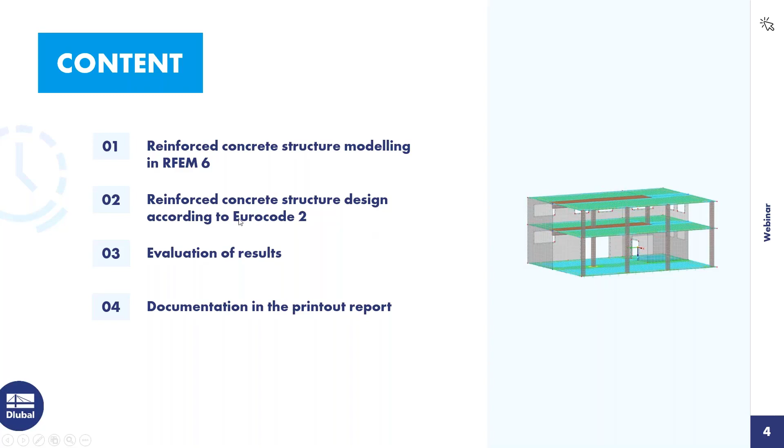I will show how we can work with the graphical displaying of the results, and also how we can print the results into the protocol in the printout report, and document our calculation. I will go now directly into the structure, into the RFEM structure.

The structure was already defined with the members and the slabs. I will only give you a short overview about the objects used.

The basics of reinforced concrete design, and also the design of members, the reinforcement definition of members, and the design using member representatives if we have more similar members, was shown in the first webinar for reinforced concrete structures, made in November of last year. That webinar shows the basic steps, how you can define the properties and settings, and my colleague Caroline will put the link into the chat where you can find it. It is very good for beginners.

So today, I will go into the design, especially focusing on things which weren't shown in the first webinar. The punching design wasn't covered in detail there, and neither was the rib design.

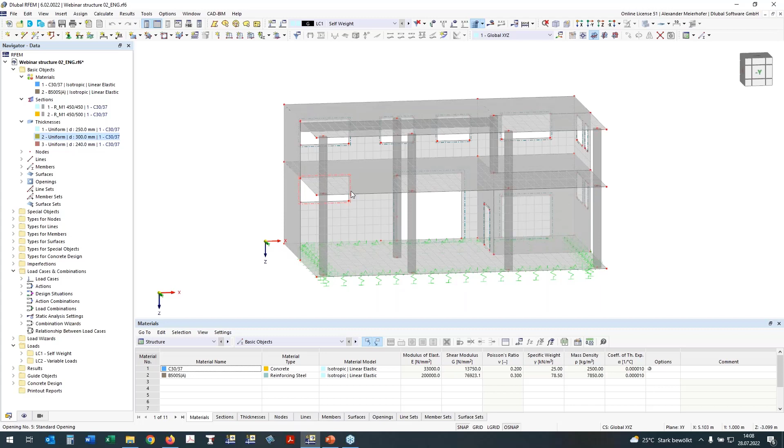The building now has elastic springs, so elastic support, and this will have also influence later in the settings for the deflection design, which I will show you.

At first, I want to deal with such nodes where we have the connection between the columns and the slab. Here we should make it in this way that mesh refinements are placed to have a better FE mesh.

For this, I go to the data navigator, where by double click I can open a new nodal mesh refinement and give my settings, which I have for radius 1 meter, and the inner target FE length is 15 centimeters. It comes from the dimension of the cross section of the columns.

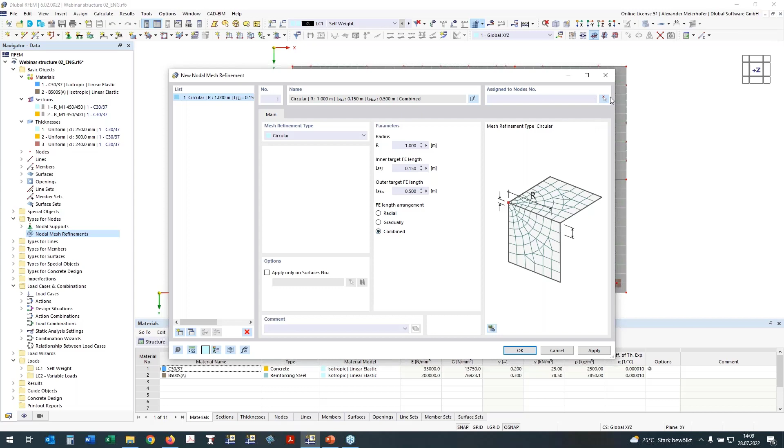For the length arrangement, I use the combined approach, and now I will assign the nodes with two rectangles where I want to have the refinement. If we take it through in the isometric view, we will see I have it caught, and everywhere now was my mesh refinement.

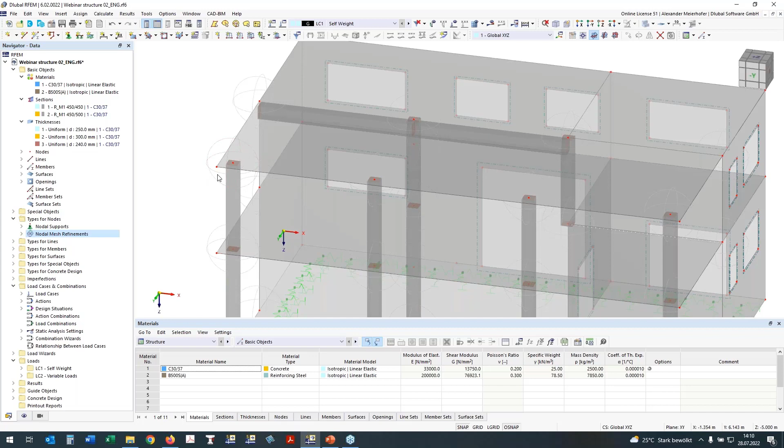On these nodes from the column and the slab, we have also singularities, and how we can deal with these singularities in the concrete design is described in a very good knowledge base article on our website, which I want to advise you. Caroline will also send the link to this technical article in our chat, so you can find it very easily.

I will continue and select one approach, which is the use of the surface result adjustment. It means I will select or define the area which is exactly the width of the column, and set there the inner forces of the surface to 0.

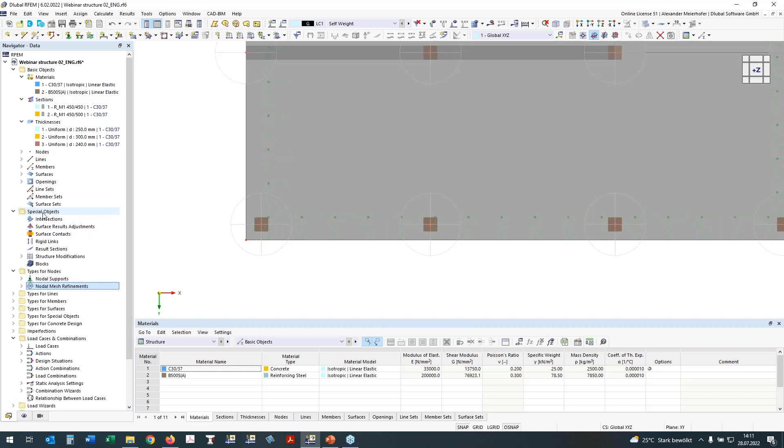Surface result adjustment can be found on the special objects. By double click, I can open the dialog, and now we can define a new rectangle result adjustment with the dimension of our columns.

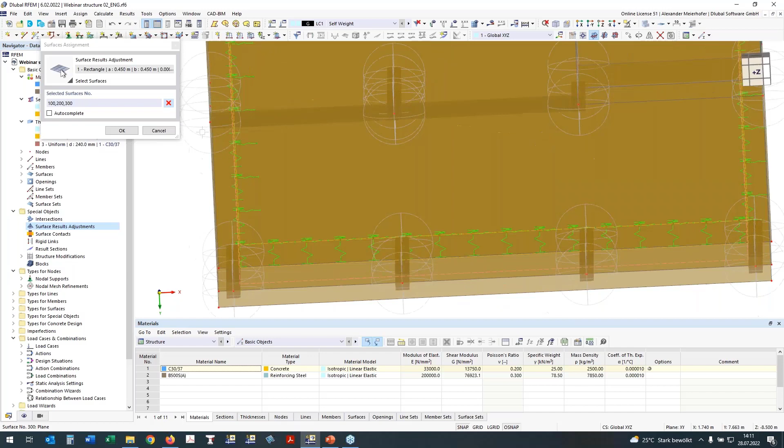I want to have it on all 3 surfaces, and you see the number of my surfaces was so chosen that I know where it's placed. So 100 is the slab on grade, 200 the slab over the ground floor, and 300 is the slab over the first floor.

If I press OK, I have already assigned the surfaces, and now I have to define the center of my adjustment. By copy, I can simply copy this adjustment and set only the new center of the result adjustments, and then I will have it in all areas.

I make one new and want to define it also over the wall. The width is 25 centimeters, and I defined a little bit bigger area, and defined it here because here is a wall. Define it also in this area.

I made one mistake, now I forgot the adjustment type to define it. I want to set it to 0, and I want to set all inner forces to 0, and this should be done for all defined adjustments. So I was one step too fast before.

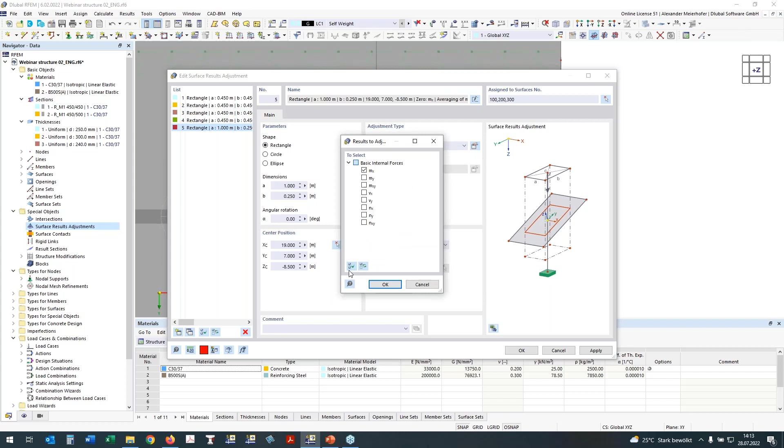This should be done before I copy it, and then it is also always in the right setting. By OK, it will be placed. We can see it, and we can also work here by drag and drop. We copy it by drag and drop. If we press the Control key, you can put it by drag and drop, and it's very simple to work with it.

So this is then for the connection of the columns to the slab. One additional setting for the slab is necessary. I want to have hinges here over the length of the supported line. The definition is very simple.

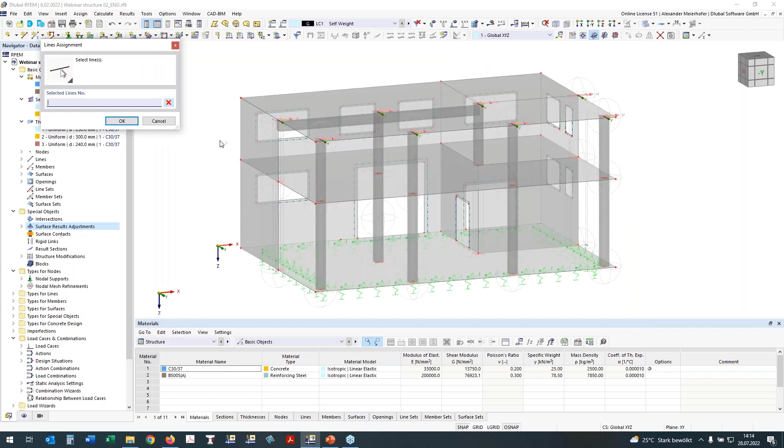We make a double click on the surfaces, and the edit surface dialog will be open. Activate hinges, and in hinges I click to select lines, press Control, and then I have selected 3 lines where I want to have hinges. The hinge type is by default already the moment hinge, and I will put it to all lines, the line hinges number 1.

Okay, it's ready now, and if we take a look at our refinement, it is everywhere placed, and also the adjustment. In the display navigator, we can deactivate the mesh refinements because I don't need it anymore for the work now, and the graphic is then more clear for the presentation.

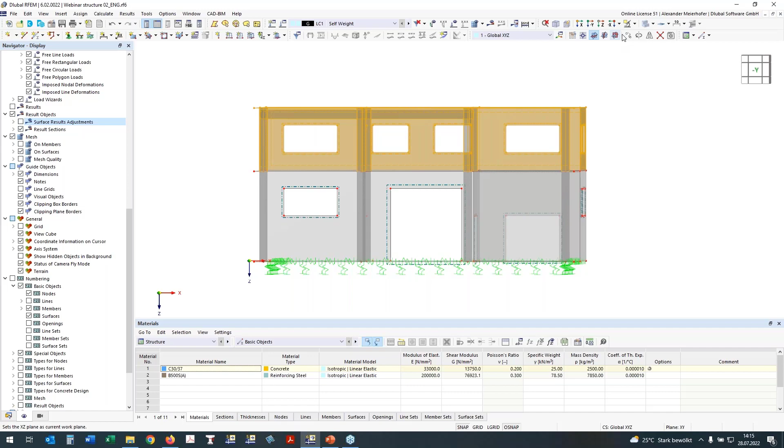As next step, I will define the rib for the slab over the ground. For this, I will hide the first floor by selection, and now I have the first floor.

By using new member, I can define now section rib by selection of the section number 2, which should be used for the web. The web should be 500 millimeter high.

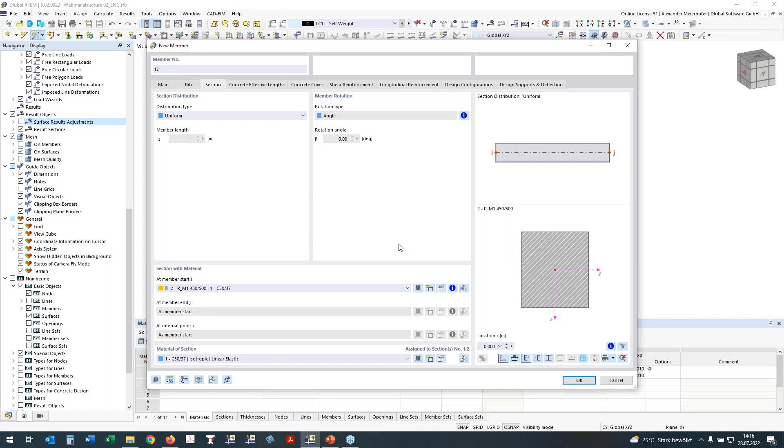I can define now the rib from here to here, and also from here to here. Oh, something was wrong. Okay, I do it again.

I know what the issue was. I will make the selection new and select only the slab which I want to show. So the new member is the same section, section number 2, and then from here to here.

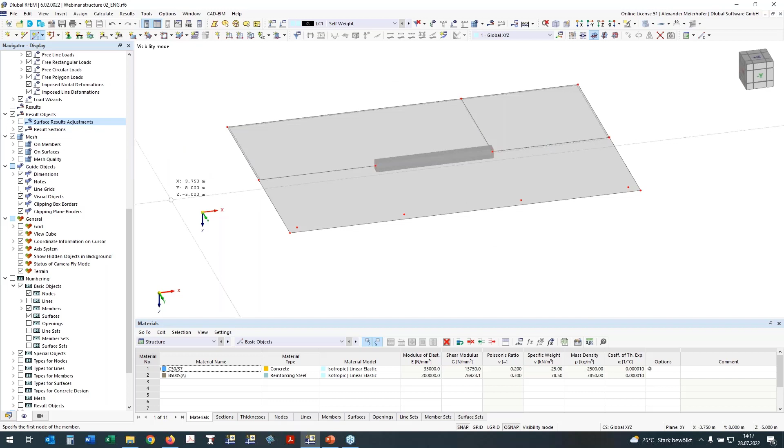By escape, I come to another point. If we take a look at the complete view, we see in the first part I took care of the rib. I go now into the rib section, and this is a very new feature: we can now also define more sections or segments during one length of the members. This is completely new developed.

I use here the calculation of the width, the integration width according to Eurocode 2, and the splitting of the segments can be done in 50%, 85%, and also 100%. Now we have more integration points. Here we have an inner support, and this means we have to consider for the calculation of the integration width the length of the neighbored span length. So I have to define here 180, and I now have my different integration widths.

We also have a new option to make a linear distribution of the integration width, and now we have defined the rib for the design.

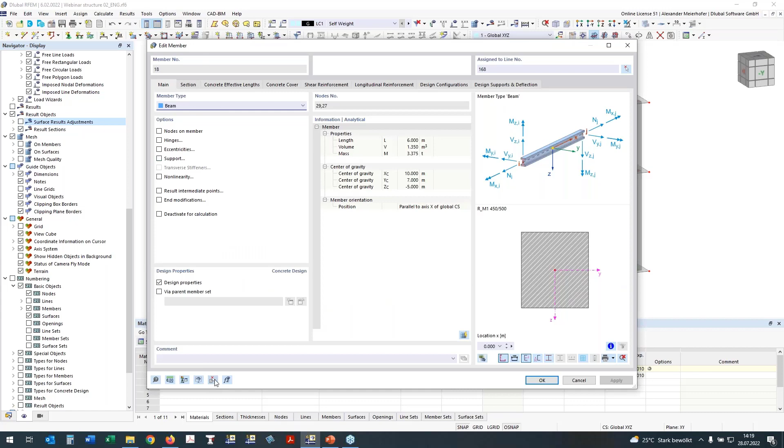For the second member, I use here the copy of object selections. It's a very nice tool. If I click here, we have really copied all inputs for the rib, and the only thing I have to change is that the end field is related to the segment, and this is for the user-defined point 80. Then the inputs for the static analysis are ready.

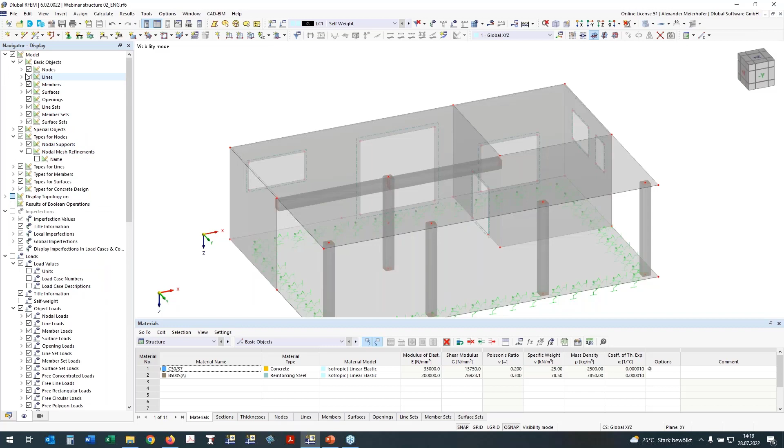Now I do it again as before. A very nice feature from RFEM 6 is that we can show the rib section also in the graphic, and we see that the integration width is also shown here in our main graphic of RFEM.

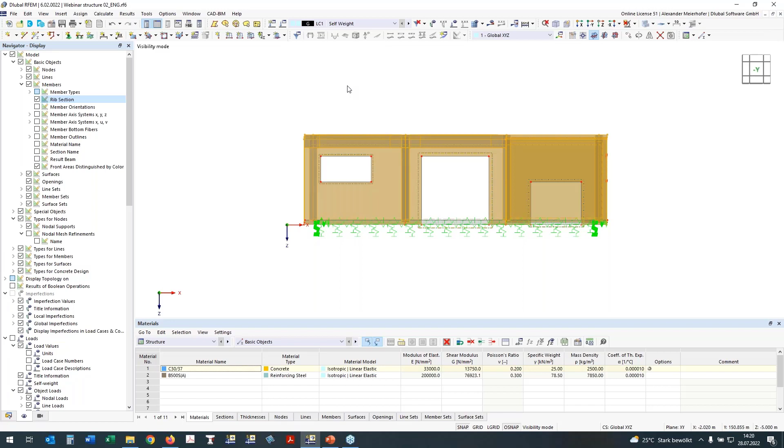Okay, now I will select again my slab here, and continue with the definition of the design properties.

The design properties for the reinforced concrete calculation are activated by double click. I come into the surface dialog, and I continue with the concrete cover. The concrete exposure durability is defined by the exposure class, which defaults to XC1. This is what I let it be. It's okay.

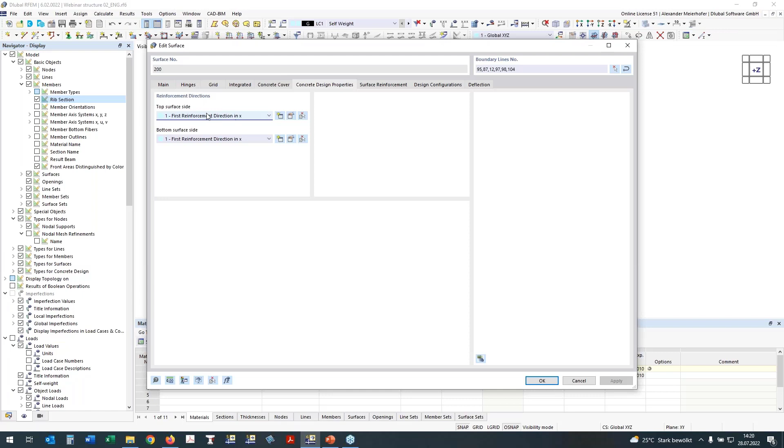The design direction of the reinforcement is the first direction, which goes in X. This is also default, which I will not change. And here is one important topic.

In the surface, I need a surface reinforcement with diameters so that I know the statical depth for the calculation. I just design a type of basic reinforcement, which will be in both directions, the diameter 10 with a distance also of 10 centimeters, and by pressing OK it will then be assigned to the surface.

Here are listed design configurations, which I don't discuss today. This was covered in the first webinar in great detail. I will later take a look at the serviceability configuration.

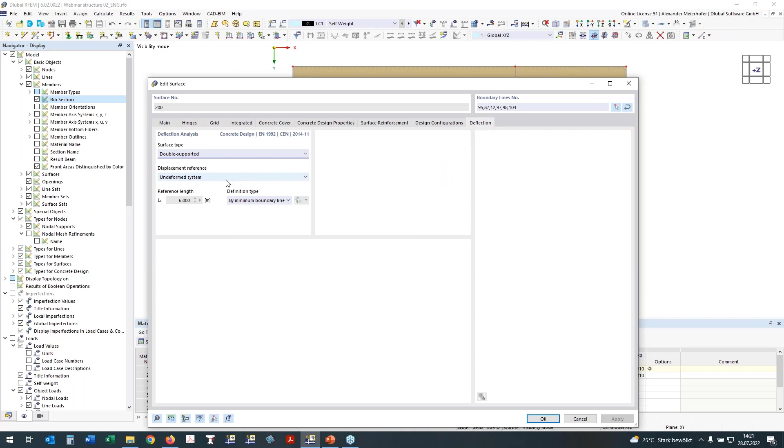But here's one very important thing, which I mentioned before at the beginning: we have an elastically supported structure. Therefore, it is an advantage to relate the deflection to a also deformed slab or plane. Here I use the parallel moved slab as a reference plane for the deformation, and as reference length I will define it manually by 2 points, saying my reference length for the maximum allowed deflection is from here to here.

It's about 5.5 meters. By OK, I have defined all properties for the reinforcement design. We can also take a look at the graphic.

If we go to the types of concrete, we see here we have surface reinforcement longitudinal, and if we activate it, we see that the reinforcement is defined in this area.

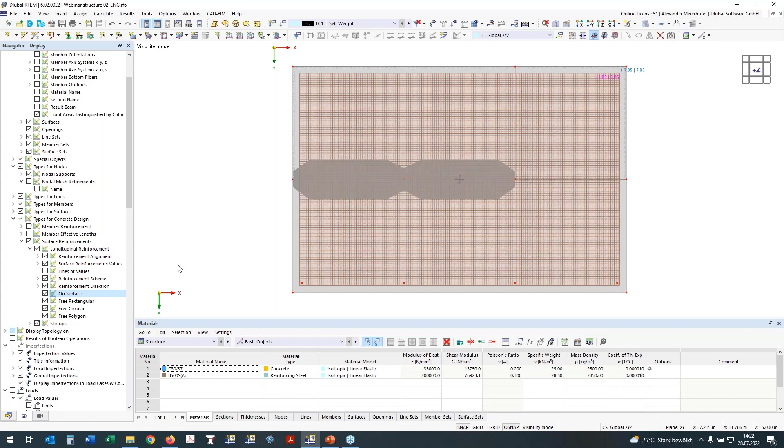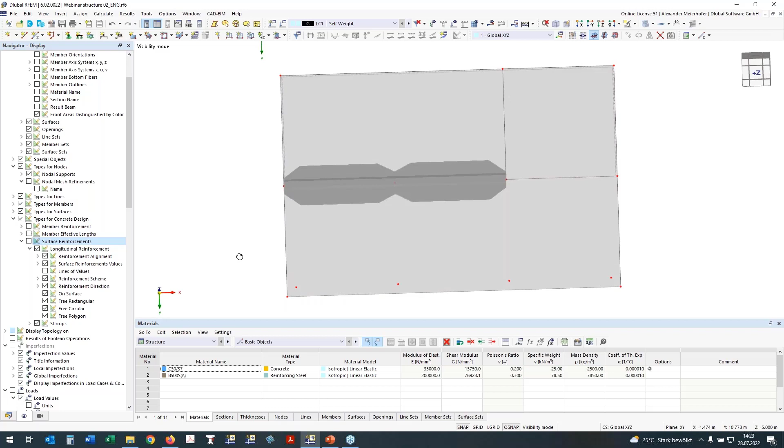I will go now to the definition of the ribs. Here we need also reinforcement. I want to design not two members, I want to design it with a set of members.

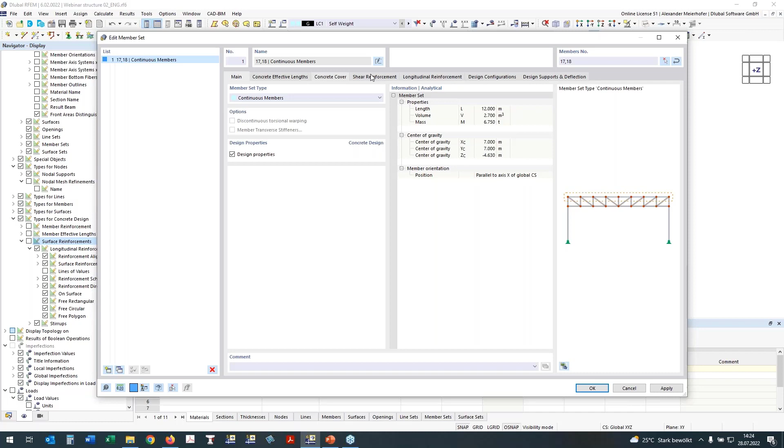So I select both by pressing the Control key, and create a new set of members. Here we have now the new set of members, and I can say design properties for this set of members, and we see that now all inputs for the design properties are open. It means the concrete cover is now shown, and here we have also the same durability which we have already used for the slab, XC1, and the shear reinforcement.

I will change the distance to 50 centimeters, and if we take a look in another view, then we see here the cross sections, or the variable cross section of the rib, is already shown, and also there is the reinforcement. I will go to the longitudinal reinforcement. We see here the reinforcement which we have defined for the slab design is already placed here. If we go more, we will see it.

It is activated by this icon. If somebody doesn't want it, you can deactivate it or let it. I want it, so I will let it here.

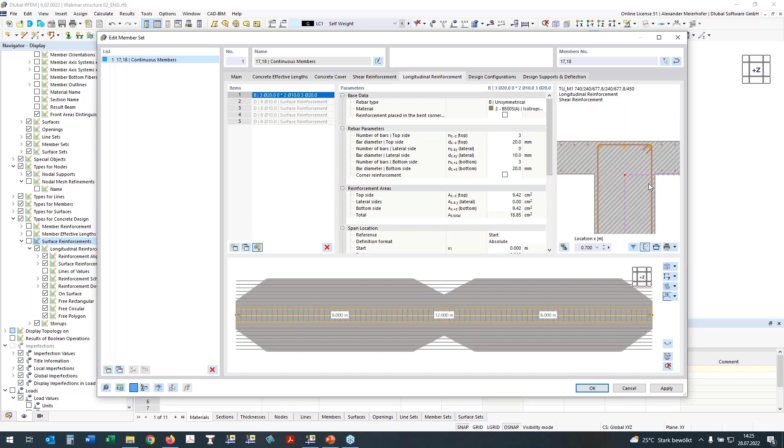But I will define now a different distribution of the longitudinal reinforcement. I want to have it unsymmetrical here in the web. So on the top side I will define these three rebars with diameter 20, but a lateral reinforcement also from 2 diameter 10. And on the bottom side, I want to have 3 diameter 20. It will be directly updated here in the graphic.

Here is also the 3D graphic of the reinforcement, which can be used for control of the inputs. Here we see a small reinforcement drawing, also the used shear reinforcement, which can be activated or deactivated. It's nice for control and for printing.

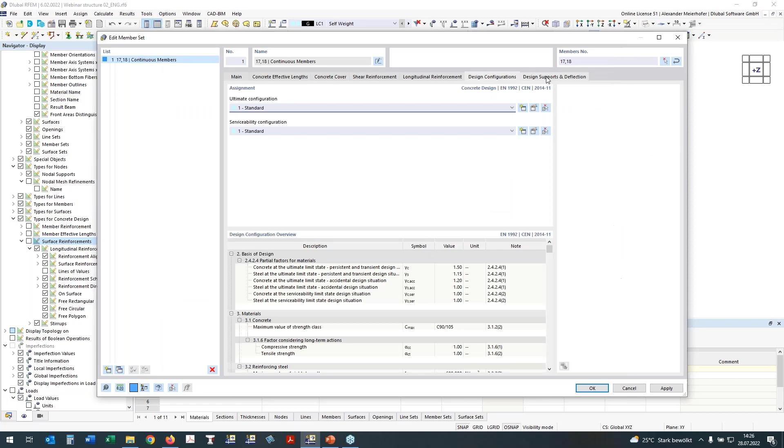Okay, I can close it. Design configuration is the same like for surfaces in all parts. And now is one important tab. We have to define now the deflection properties or conditions.

I want to check it only in the deflection in Z direction for the gravity loads, of course. And here is the point: my reference is then the deformed segment ends. This is also the point which I mentioned. We have an elastic supported structure, so it means also the supported ends will be a little bit displaced in Z, and this I don't want to have in the design check for the deflection.

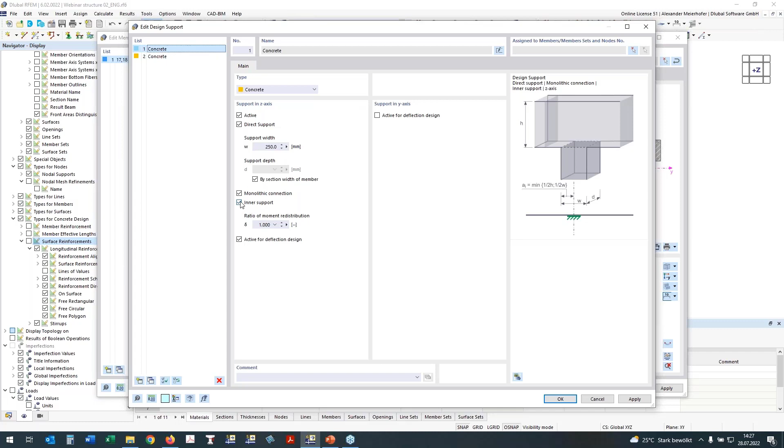Important is that I generate on the ends or in the middle some design supports. We have here design supports in Z direction, and our wall is 250 millimeters. It's a monolithic connection, and will be used for the walls on the end and the start. I directly copy it and use here also the width for the columns, which are inner supports, and here I have to deactivate inner supports and press OK, and then it will be placed directly at the beginning.

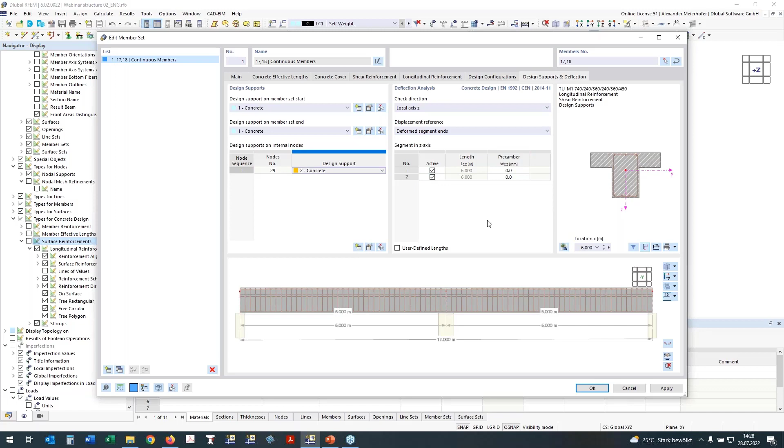I will change here the view to see it. Here we have the first one, and at the end it will be also placed, with the 250 millimeters width. And in the center I will also use the design support, but it is now for the column and it's bigger, it's 450 millimeters. And we see here now for deflection we have some lengths, 6 meters and 6 meters, and if we have some pre-camber we could define it here, but in this case I don't have it.

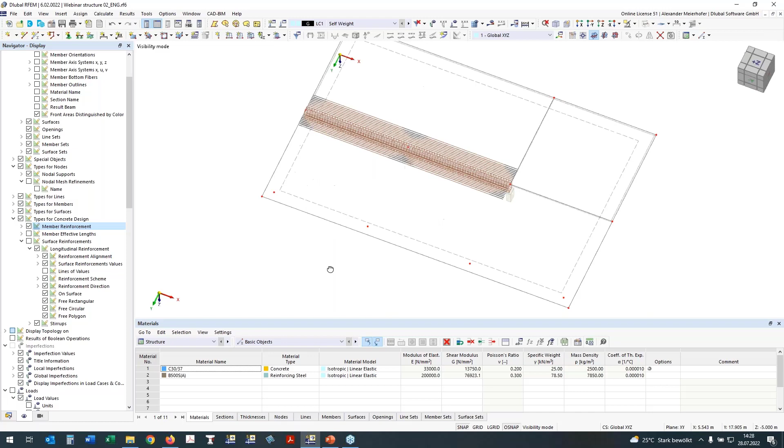But okay, we have now, we can confirm the inputs, and also we can check the member reinforcement and display it, and see that everything is okay.

Before I start with the calculation, I will make now new object selections. I have to be a little bit bigger. Create new object selection, and the advantage which will be done with this object selection you will see immediately after closing the dialog.

This is my slab over ground floor, and I press OK. And now we have here in the guide objects, the object selections, and you see I have already done a little bit more, but the new one is the object selection number 200.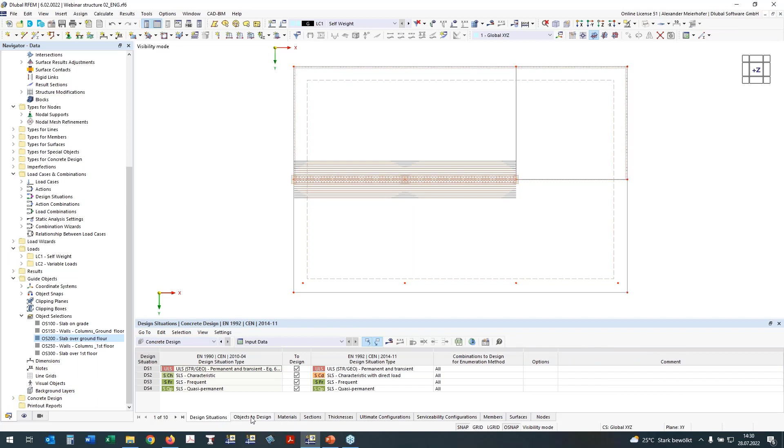And if I go now to the concrete add-on, I can use the object selections directly to define all objects which are there in the add-on. It is then replaced, and it will only show the object, and it is very good to organize the work.

Before I start with the concrete design, one hint about what you have to check in the basic settings: you have to activate the concrete add-on in the design add-ons, and in the standards you have to define the used standard for reinforced concrete design.

Here I will use Eurocode 2 with the original rules, so without national annexes. If we have the loads, this is also an additional hint. I have defined a load case for self-weight and variable loads. We have to define the action category there, it's for the office. And in the base data I have defined the combination group and the combination wizard.

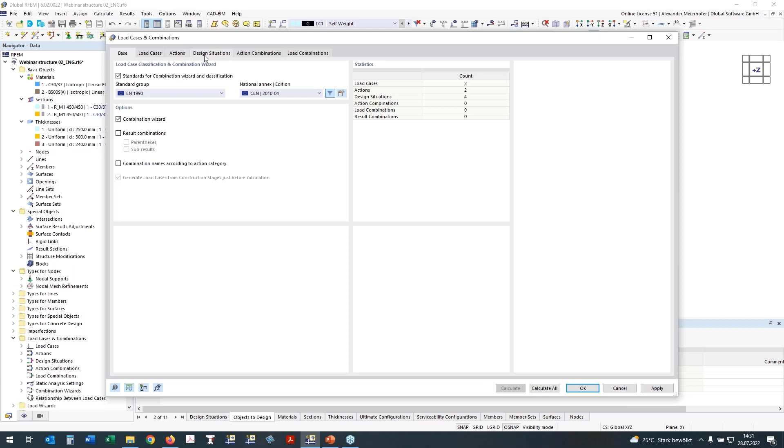In the design situation, the serviceability and ultimate limit state design situations will be listed automatically. Here will be the list of all activated design add-ons. Here we work only for the concrete design, so I activated it for the concrete design, and all load cases related to this design situation will be calculated.

I can multi-select it, and what I have to do is select my combination wizard. The combination wizard here is defined in this way, so that we generate load combinations, and the static analysis should be done by first order and geometrically linear.

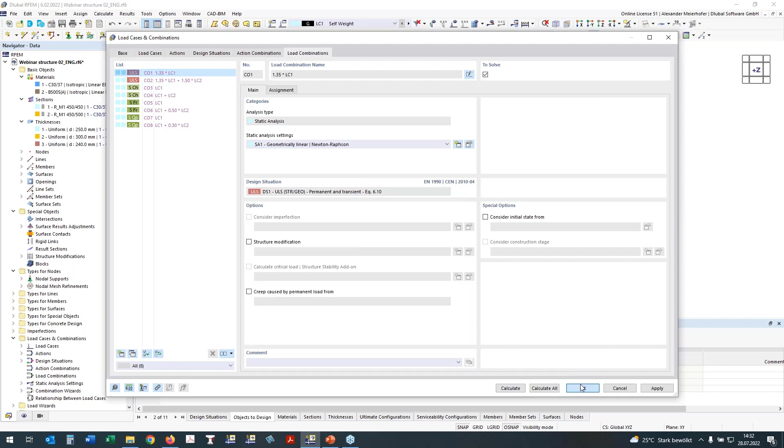If we go then to the register load combination, these combinations were generated automatically and will also be used in the design of the reinforcement.

Now I go back to the add-on concrete. We have here already designed the object selections. Material and sections are only listed for control. Here are the configurations or settings which should be used for the ultimate limit state.

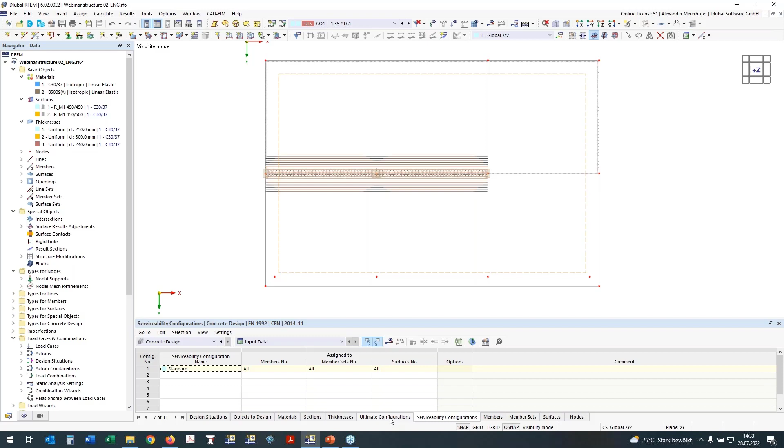Here we have the serviceability state. I will take a look at the serviceability state configuration, and here we have the stress check and crack analysis, which should be done by automatically finding the limit value for the crack width according to the defined exposure class. We have XC1, so I expect in the calculation 0.4.

With deflection calculation, here we have this L, the reference length divided by 250. And here is the crack state detection for serviceability. I want to explain this a little bit more, because it is really new - we released it two weeks ago - so I'll take a bit more time for it.

The first option is the crack state calculation for each associated load. So each load case or load combination will be considered and calculated for itself.

Crack state determination as envelope of all SLS design situations: it means the program checks all load cases defined for serviceability and then uses the correct element or state, whichever is the most safe setting.

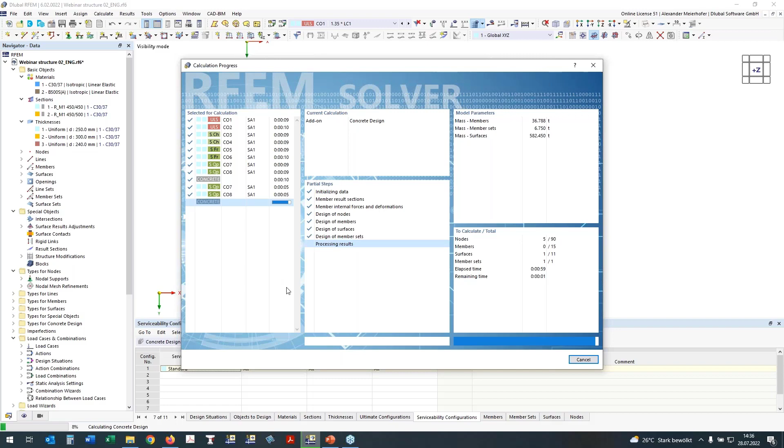Okay, so now we have an overview of what is fulfilled and what is not. We have very detailed tables. This work with the tables was also shown in the first webinar.

Today I want to work more with the graphics, and now use only the settings for the member. Design ratios of the member we see here - it is everything clear here.

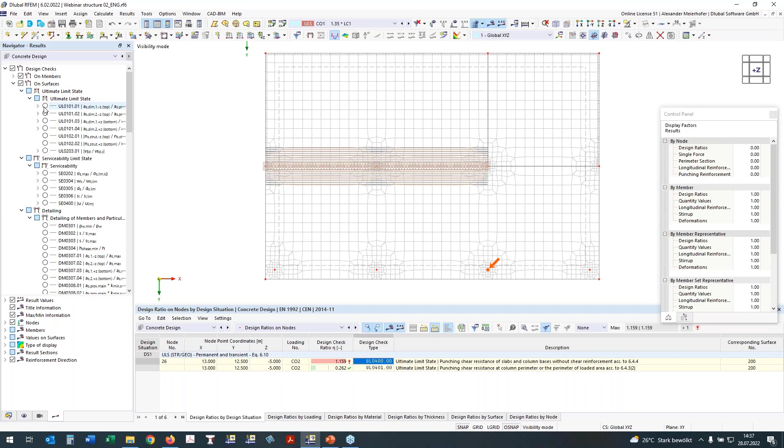I will go now to the graphical results, and firstly we took a look at the results of the surface, and we have here the result values. I want to activate it as only extreme values, and here we have the panel. So here's a ratio of the defined reinforcement, the ratio between the defined provided and the needed reinforcement.

And here we see, in the red areas, we have less reinforcement defined. On the top side, here is also a punching problem. I would expect, of course, more reinforcement here for the punching design.

If you take a look at the bottom reinforcement in the first direction, we have here everything in the green area. The maximum ratio is also on this small part, but the main area is under 1. And the second direction on the top, on the bottom reinforcement direction 2, is also okay. We have here a ratio of 93%.

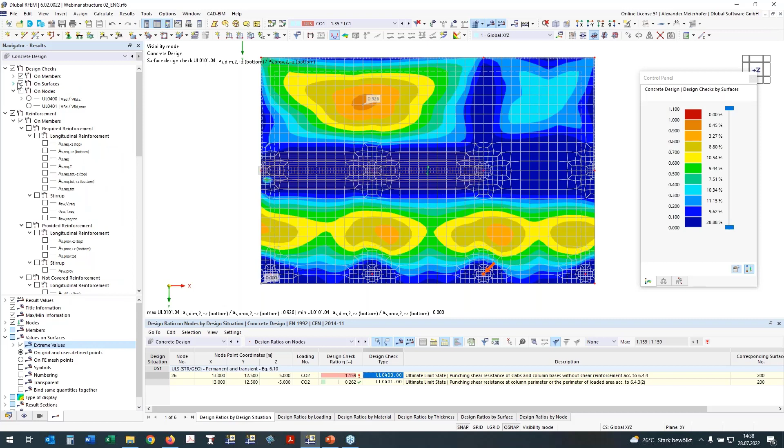To work with it, I will go now to the reinforcement and take a look also at the nodes, and show if we need a required punching reinforcement. And here we see for the required punching reinforcement, we need 0, but we need then longitudinal reinforcement. In the configuration, I said please calculate the required longitudinal reinforcement to avoid shear reinforcement. And we see if we would place here 12 or 13 centimeters, everything would be nice.

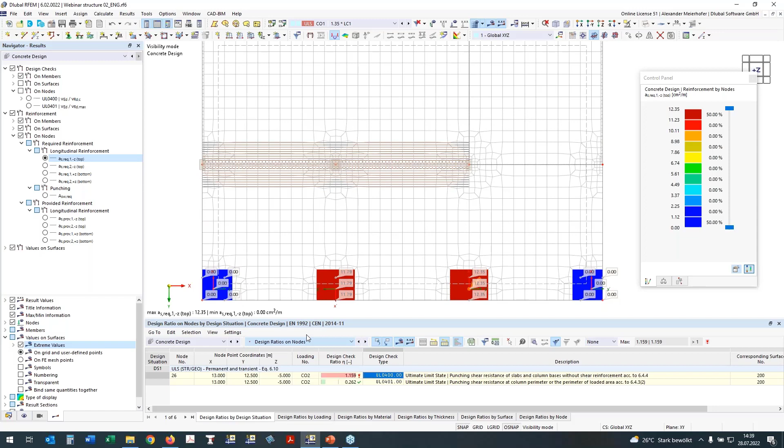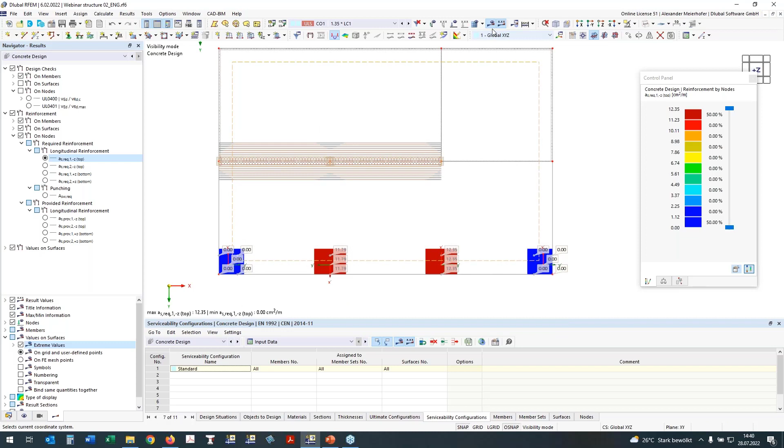I will now define the missing reinforcement. For this, I will go to the global settings of my module add-on. I will deactivate the deletion of my add-on results if I change the reinforcement. And now I can work in the inputs. I deactivate also the mesh so that I have a nice view.

And go now in the data navigator to my types for concrete. And for types for concrete, we have the surface reinforcement. With new surface reinforcement, I generate a new one, which is a free rectangle area. I assign it to my surface number 200, and the missing area here is for punching about 7.8, and I want to have it also only on the top direction.

And here is the area which I want to define. I activate my grid to have here good coordinates. So I have a grid of 25 centimeters, and this area is already defined. I copy it like it was for the surface results adjustments of the surfaces, and I can use here really the same concept.

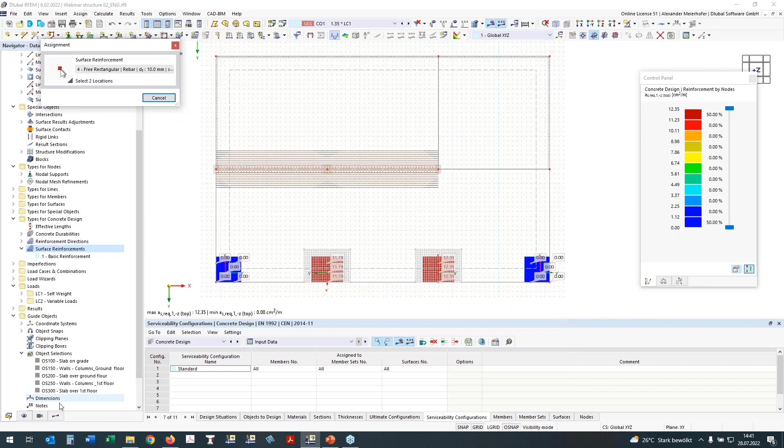Now I want to do the input also on the other missing parts. For this, I copy the existing one and go in the result navigator, so we can really activate here our graphic for what we want for surfaces, and say the surfaces have an uncovered reinforcement on the top side in this direction. And if we take a look here, I will define the same area over my supported line in the first direction, and in the second direction I will define the same area, and take a look what is here. Here I need also some reinforcement, and I took it over this length.

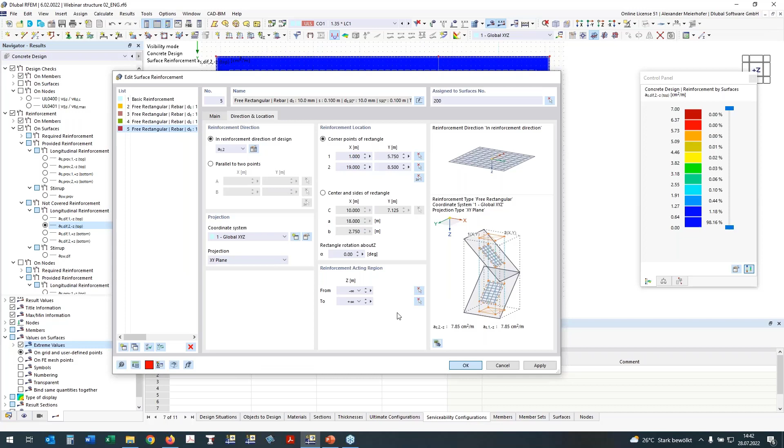It was a little too small, so you can also make it again, and by pressing OK, it is then confirmed, and it is in the structure.

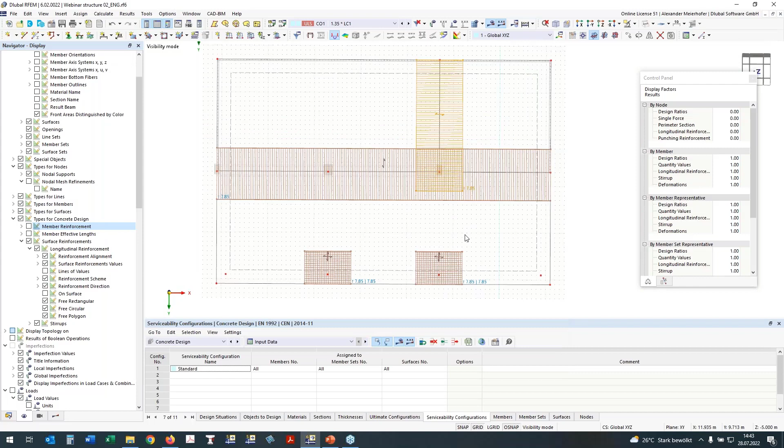For the surface, I can then take a look where is my surface reinforcement. I go to the surface reinforcement and deactivate on surface, and we see what part of reinforcement is defined, and I can also check if the direction is right. Here I have defined one thing more too much, so I want to have only one direction, and it's the same here. By OK, we will see I have only one direction. So easy is the definition of this additional reinforcement.

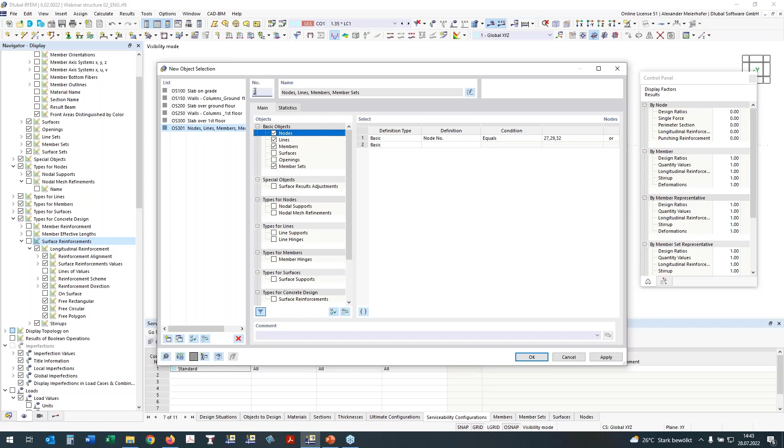Now I want to take care about the reinforcement in the rib. For this, I select it and change the view, and generate also a new object selection, which will be then the name should be the T section.

Press OK. And here I work now with the design checks on members, and take a look how is my cross-section resistance. We see I'm under 1, so everything is nice. If I take a look at the shear reinforcement, the shear proof is also fulfilled, so I need no additional inputs. The serviceability is done in this way, that the stress of the steel is checked.

We can take a look at the crack width, and the crack width is also fulfilled.

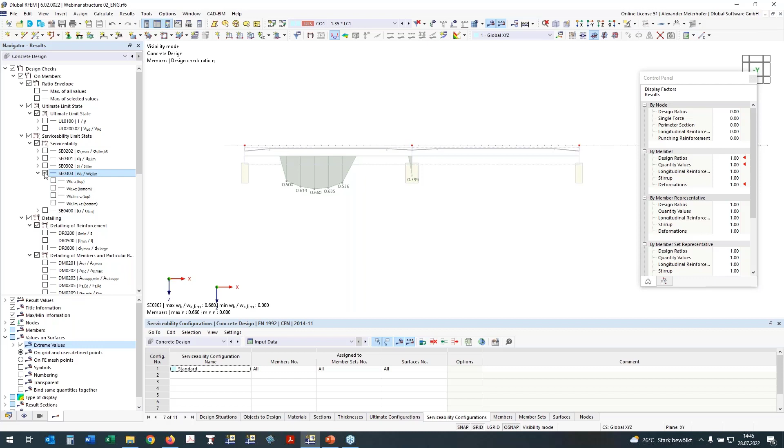Now we want to show you the newest release. We have here the additional details in the result navigator. This is since Monday in the new version, which you can download from the extranet of Rfem 6, and you can activate here also then the direct value of the crack width.

For example, we have here only 0.26, and it is also for the deflection. The ratio is very small, and the existing deflection is now 0.6, and we see here it is related. Here is the end, it goes to 0, and this comes from the relation to the deformed structure.

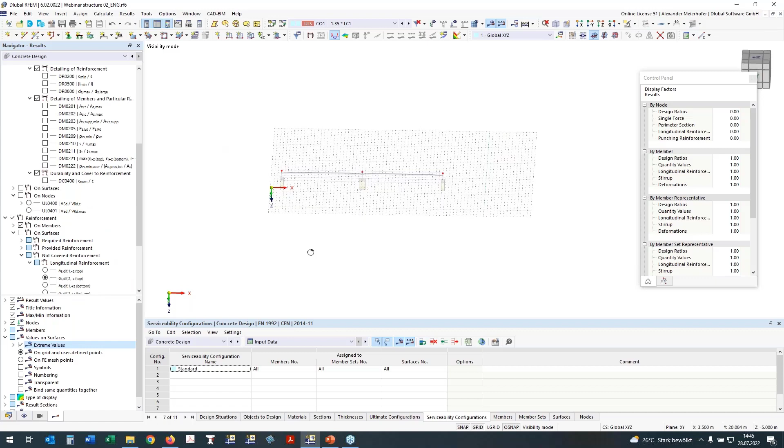Okay, if we take a look at the required reinforcement, it is also here in the table. Required reinforcement of members, As top, As bottom, and we can take a look at it. You have here the graphic, and if we want to print it to the protocol, we have to generate a new protocol.

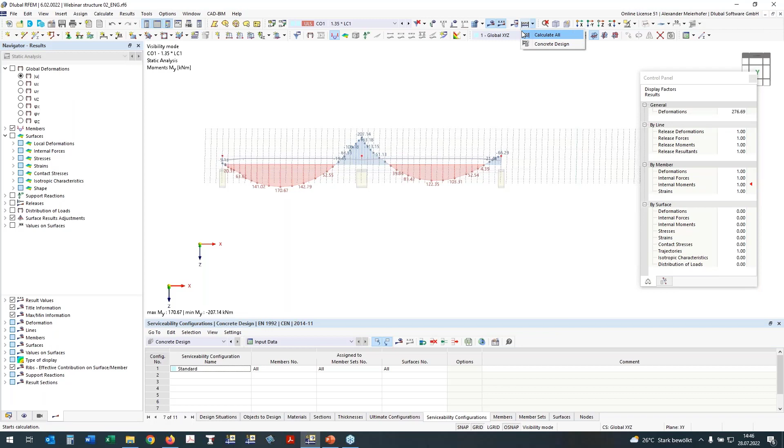But what we have to consider is that the calculation must be done again since we change the reinforcement. For this, I go to the global settings, activate the deletion of the add-on results, and then it will be updated and deleted. Now I have to start the calculation of the concrete design add-on new. You can do it also here in this icon and start only the calculation of the add-on. The statically analyzed results were not deleted because the reinforcement has no influence on it. Now it is only the calculation of the add-on concrete, which will be refreshed and done again.

As I said before, this is a two-step calculation. In the last step, we have here again a concrete calculation for preparation of the results and the graphic.

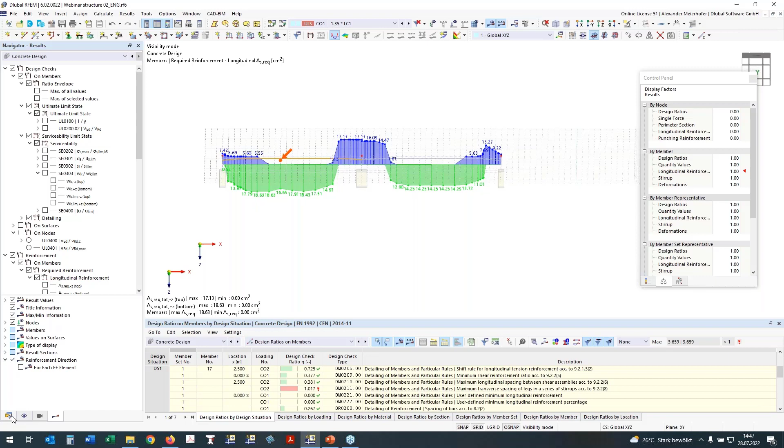Now we have the updated results. Design ratio by nodes, by members is okay. Then I will go to the printout report in the navigator and show you how simple it is to work with the printout report.

If we generate a new printout report, I make it here for the concrete results or concrete design, and assume that all other documentation of the statically analyzed results will be done separately in another printout report.

Today I want to show only the design or the report of the concrete results. So types for members, types for surfaces we don't need, but types for concrete design is necessary for the concrete durabilities and the surface reinforcement. And what I also need is here the concrete design, which we have to discuss maybe also what is necessary.

We see here it is possible to show every tab which is also available in the add-on. It can be printed, but I want to have here only the design ratio by set of members, and for nodes and for surfaces, the reinforcement for members should be also only shown by member set, because I design only the member set. The provided reinforcement by member set, the not covered reinforcement I will not show. For the reinforcement by nodes, I let it like it is, and the design overview will be deactivated.

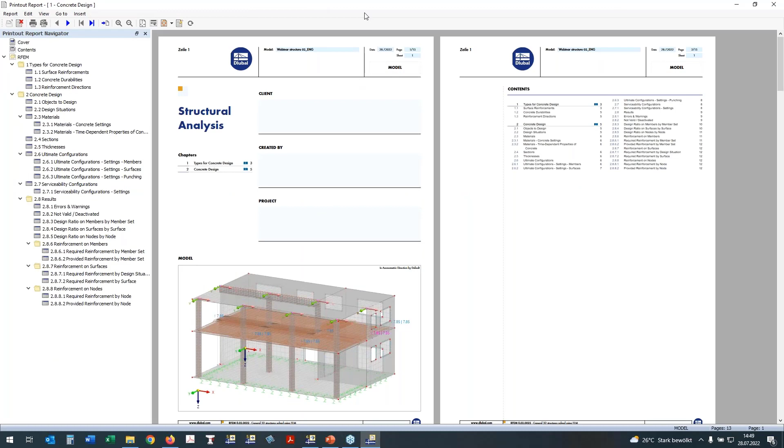By save and show, it will be generated, and the result, the printout report, is one of our new developments in Rfem 6. It is completely new. It is a separate file instance, which can be used here. It can be opened parallel to the Rfem calculation.

If we take a look at our results now, result members, then we go through the result of set of members. Here is one green. One thing is the crack control, which is overloaded. This we can check later. Detailing is 1%, it's okay. So from my side, it's okay. For the design ratio of the nodes, the punching design is also all ratios fulfilled.

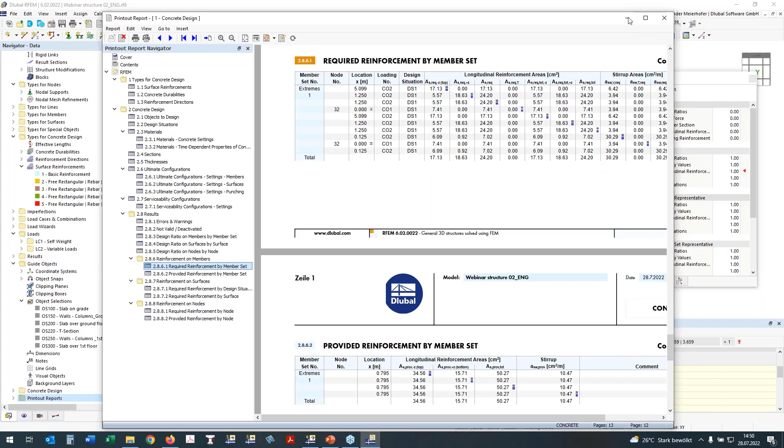And if we go to the required reinforcement by member sets, we will see then the list of the required reinforcement. Here I want to show also the point of how we can print the required reinforcement, because in my eyes a picture, a diagram, is better than many tables. Here we can use the printout report, the graphic, and here I want to use the current one. New is also the possibility to define an area in Rfem to print it to the graphic.

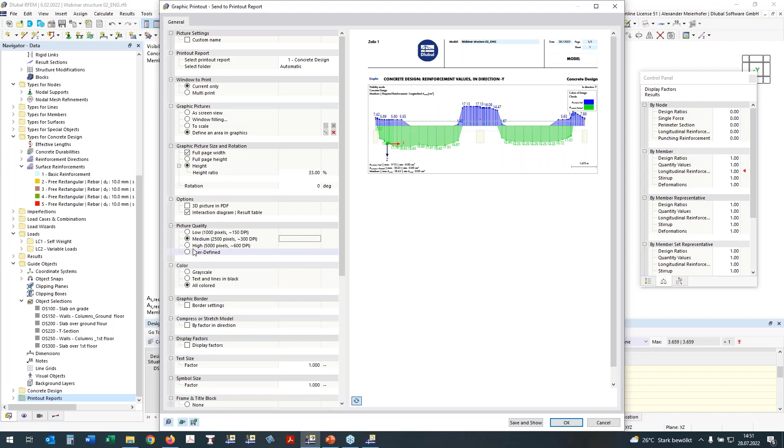I will activate the grid so we can move it, make it a little bit bigger. This area will be saved and used for later. I'll make it a little bigger height, and the panel should be outside of the graphic so it's clear. By OK, it will be printed to the protocol. If you activate it, you can see it here and make it smaller.

Everything is here. Using the inputs of the reinforcement, we can now deactivate the design checks on the required reinforcement and activate our member reinforcement longitudinally, using the descriptions.

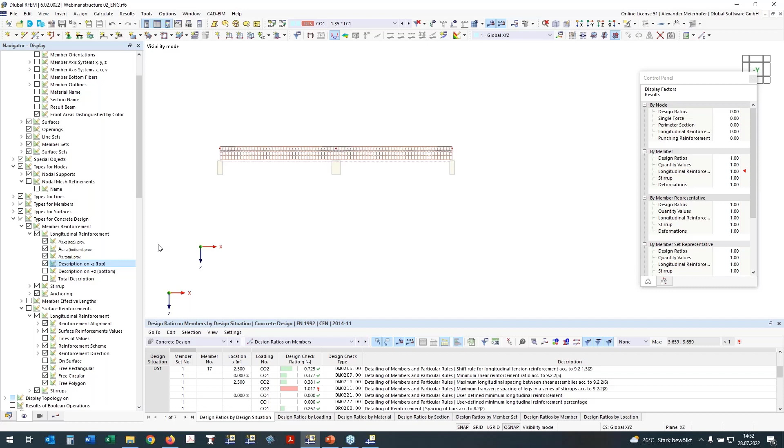With description, we can print it directly into the protocol using the same functions. The same icon will be pressed, so the area is the same. I don't change anything, and with OK it will be printed.

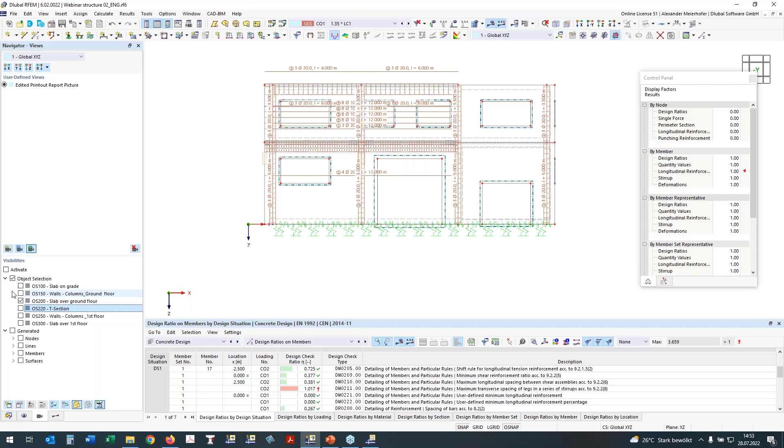Now I will take care of the slab. For this, I will go to my view navigator, the display view navigator, and this is the next advantage of the object selections. If you remember, I have the slab over the ground floor, and if we take a look at the Z direction, now everything is activated that I selected before, and I can continue with my presentation of the results for the slab.

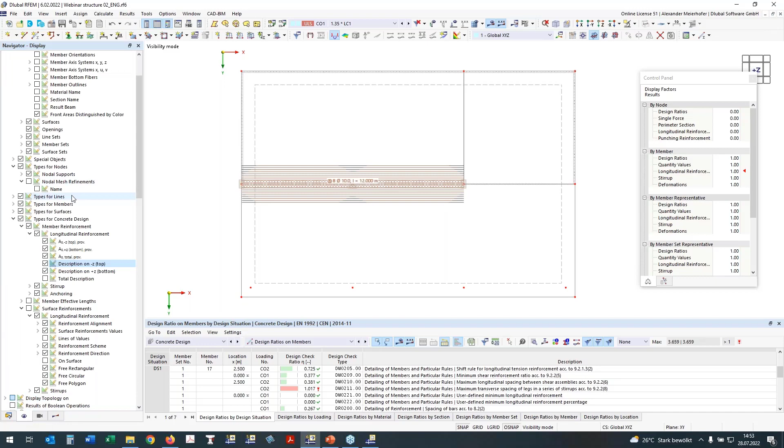First I deactivate my member reinforcement, and in the result navigator for the design checks of the surfaces, I go to the ratio of my longitudinal reinforcement on the top side. It is okay, the bottom was also okay. We take a look at the displacement, so this is a ratio like it is for members, and here is also the deflection.

Important for me now is the punching proof, because this was not fulfilled before. We see it is now under one, the ratio. It's perfect. And we can print now also a documentation of our results.

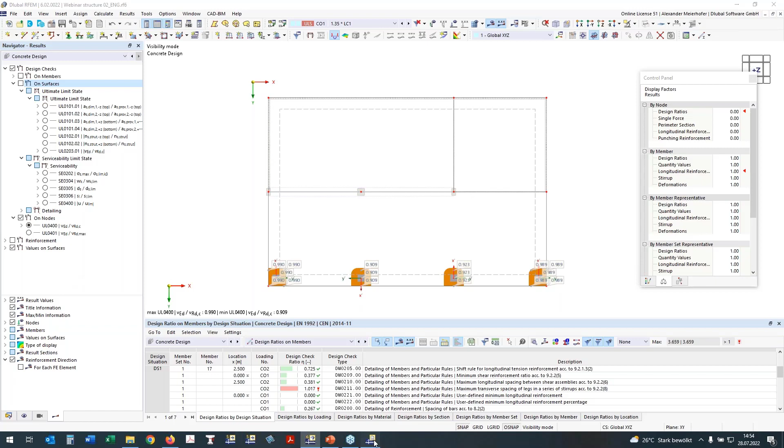I want to use now a bigger paper like it was done in the documentation. The first printout report uses format A4. I want to use a bigger format for the plots. Make a new one, a new printout report, and say this is only my annex for plots.

For this, I deactivate all settings here and generate a new page format. I have to select a printer which is able to print bigger pages. So here it's my printer, which can print A3, but you need 7 millimeters distance on the bottom side, and I don't need some cover page. With OK it is saved, and save and show.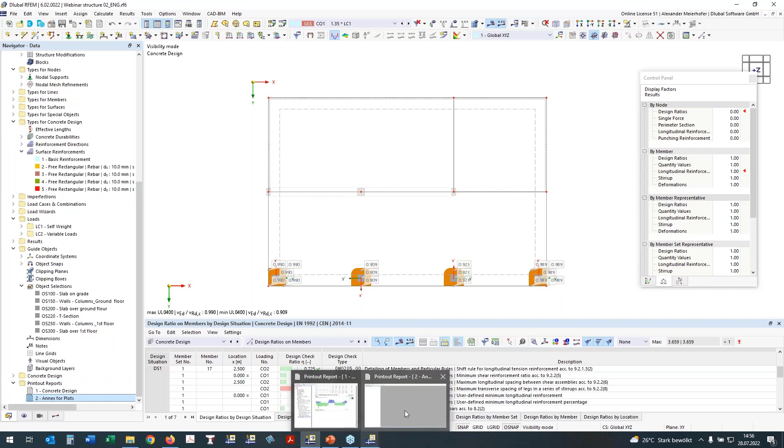I will get a new protocol, which is also shown here, but it's empty until now, because I printed no reinforcement or no result there. I want to use now again the same one and print

here the surface. You see the last view is saved. I want to have a new one. I want to use it in Z, define it in the new area, so from here to here, with OK. With the multi-print, like I did before, I can go to and print all result diagrams which are necessary.

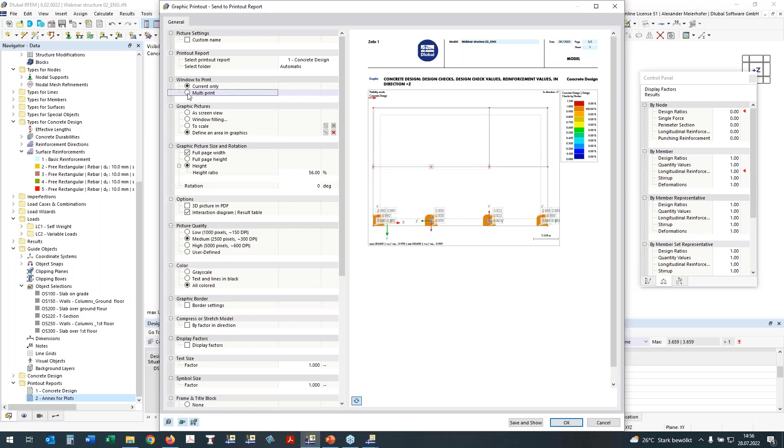The model is not necessary, load cases here not, and in the add-on. Now you see this navigator is really the same navigator as here in the result navigator in the main program, and we can really print all results which we want.

This is a very nice graphic. On each node we see the value which was assigned in the calculation.

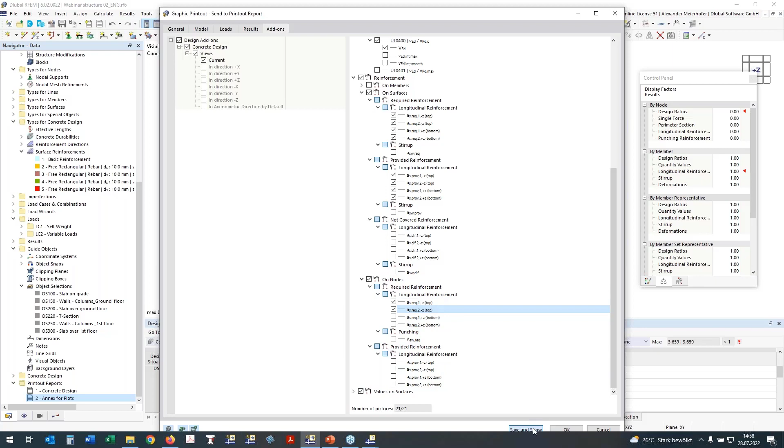Required reinforcement, of course, I want to have it shown, my required reinforcement and also my provided reinforcement. For surfaces and for nodes, I need the required reinforcement on the top side, which must be placed for avoiding the punching reinforcement and to fulfill the punching proof without shear reinforcement now.

It is now started to generate. I have selected, of course, many graphics. It is started now to generate here in RFEM, and then we will see it step by step in our printout report.

Oh, this was my failure in the presentation, I selected the wrong one, so let us take a look here. The principle was the same. Let us discuss the result. It's now in the printout report number 1.

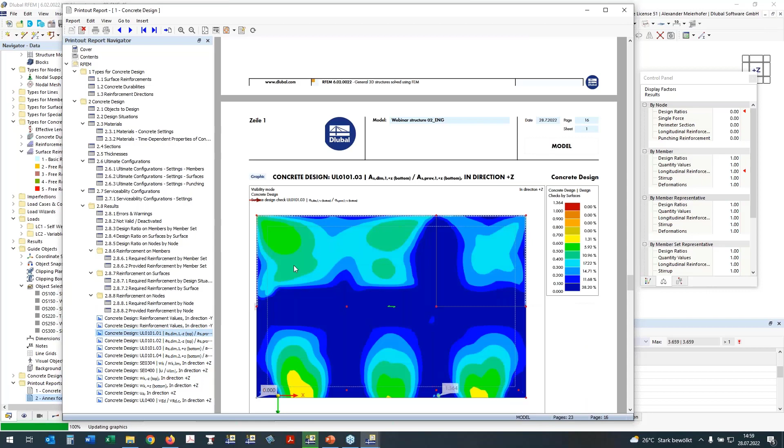Here we see the reinforcement. Everything is fulfilled, also the ratio of the top reinforcement and the bottom reinforcement, it's okay. Here we have the crack width and the ratio of the deflection, and here also the crack width on the top side and the crack width on the bottom side.

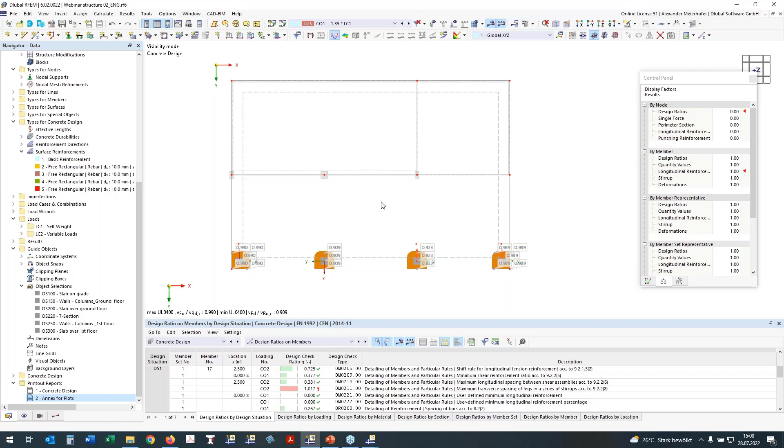Okay, this is then the design of this slab, and we are ready with the design of the member of the T section, and also for the punching nodes. And I want to show you also the punching design of the foundation slab, where it is a special case.

Here we need an iteration of the critical perimeter, to find where the critical one is. It's not 2D, it's iterative. So we also need to consider the soil stress under the ground slab. And this will be done now automatically.

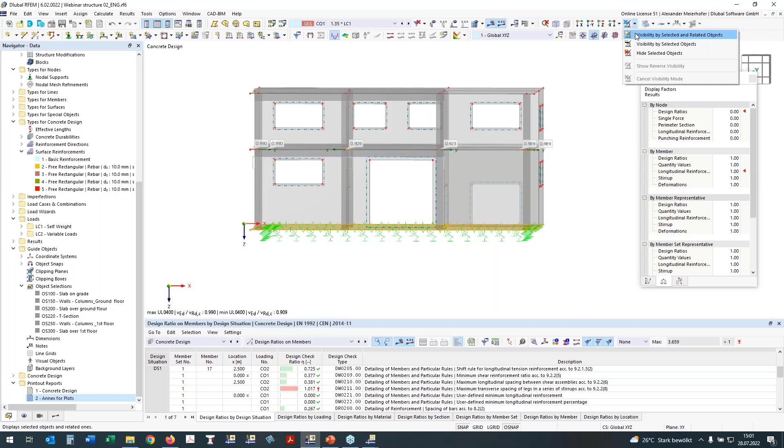I do it in the same way that I did before. Select only now our slab, take a view in the Z direction, same as what I did before in the presentation. I have to go to the node and say it's my punching design. Of course, I have new properties, and now I will delete the results.

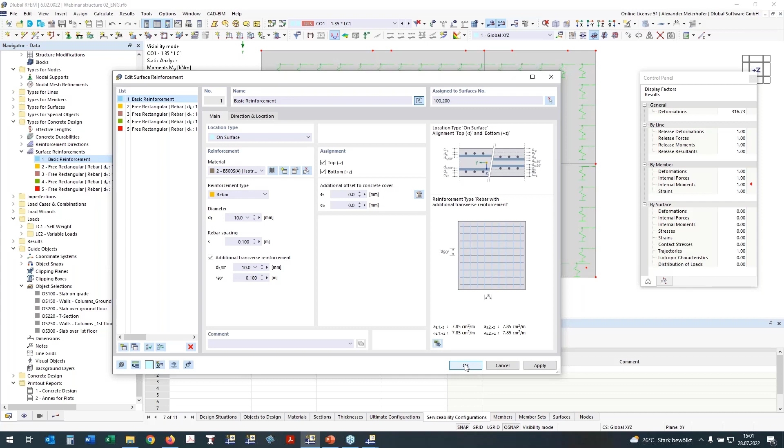Further, I have to define the reinforcement in the slab so that the punching proof can be done. This is very simple in the basic reinforcement. I use here the number 100, which I mentioned before. This will be my slab over the ground.

Then we can start the calculation of these points, if we remember. We have here different types of punching design: a wall end at the border of the edge of a slab, a corner column, a column at the edge, a wall corner in the center of a slab, and an inner column in the center of a slab. This will all be done automatically in the design.

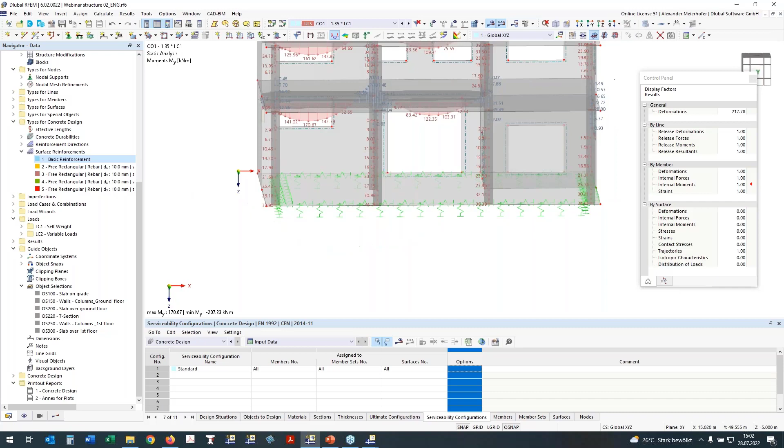I will go to my concrete design. This is now only for presentation, to show how the iteration will work. I will go the same way as before for selection. Please design this node for the punching design. Member sets I don't want, and press OK.

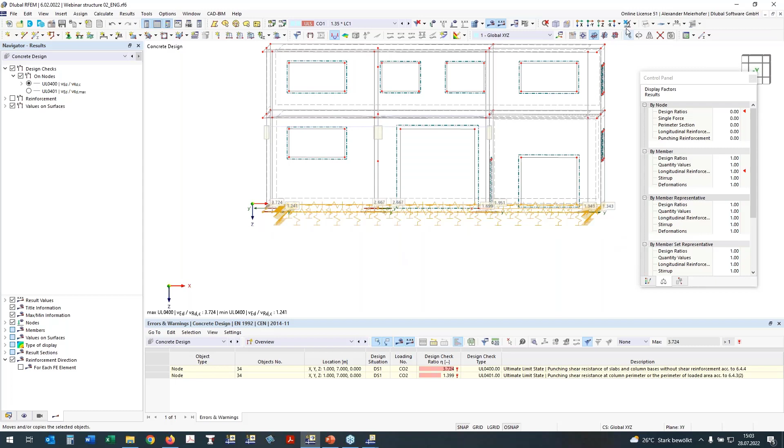Now I will calculate the punching proof for this node on the foundation slab. I will go to another view, Z direction, it's better. We see that the wall end is found, the property or geometry is founded automatically. It's a wall end. Here we have the columns, and here we have a corner.

We see also the result of the iteration of finding the critical section. Here it's a very small distance, and here we go until 2D. This means that the reinforcement is not enough, like I discussed before.

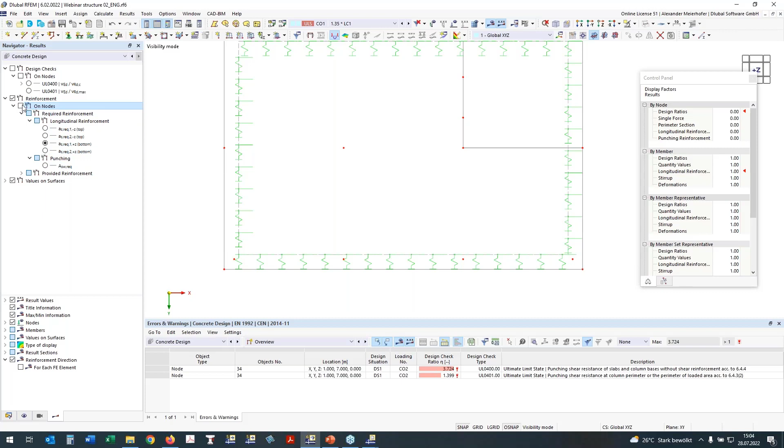And if we take a look at the required reinforcement of the punching node, we will see whether we would need punching reinforcement, or if it could be done with some additional reinforcement. We need no punching reinforcement—we can add additional longitudinal reinforcement instead. So the punching design for a foundation slab is now implemented and can be very simply used in your daily work in the design of concrete structures.

Okay, this is an additional topic or feature which I wanted to show at the end of my presentation. I will now finish and close my presentation with the picture of the punching design of the soil slab. Thank you for your attention.